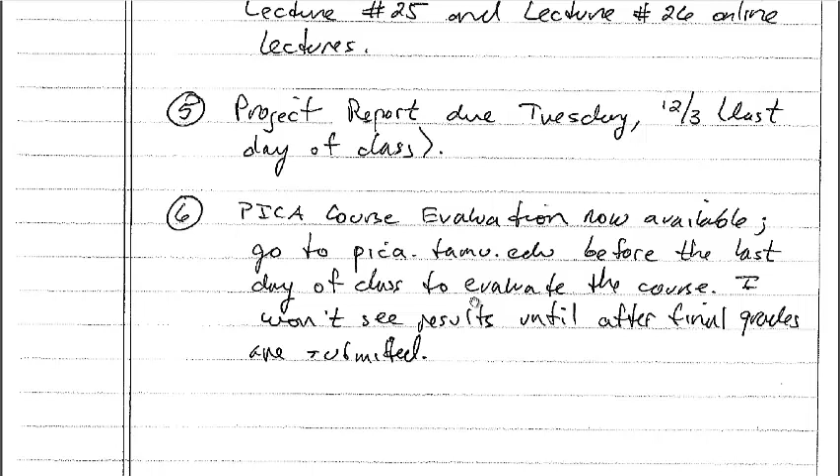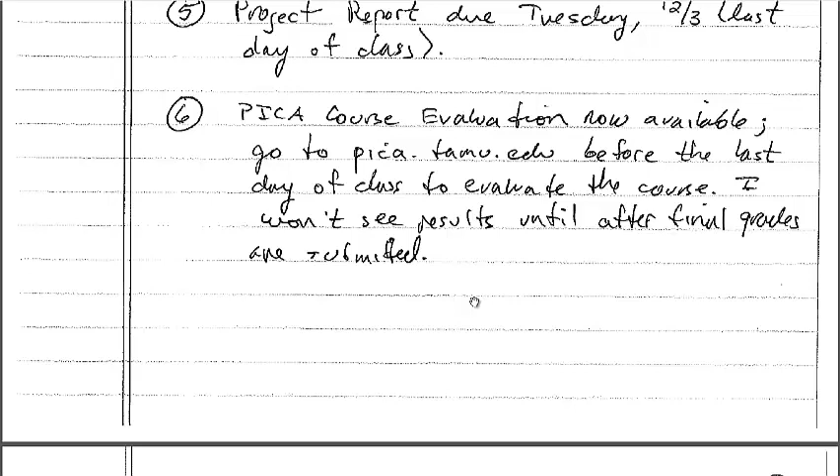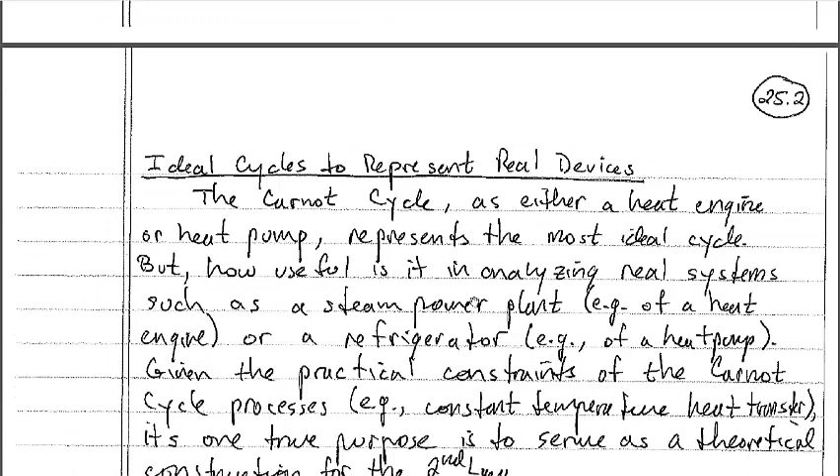Okay, on to the lecture material. What are we talking about today? If you remember where we were last week and in the weeks leading up to today, we started talking about heat engines, heat pumps, and refrigerators, combining components like boilers, condensers, turbines, and pumps. Together these make up what we call heat engine cycles, where a heat engine takes thermal energy and converts it to work energy, or heat pump cycles, which transfer thermal energy from low temperature to high temperature by using work energy input.

We then further analyzed the heat engine and heat pump cycles and asked questions such as: what is the most efficient heat engine cycle, or what is the heat pump cycle with the highest coefficient of performance? After much discussion, we talked about things like the Kelvin-Planck statement and the Clausius statement, and came up with what is called the Carnot device, or Carnot cycle, which is the perfectly reversible, totally reversible, ideal cycle.

This means that if a heat engine is operating on the Carnot cycle, producing a certain amount of work, and you put that work into a reversible heat pump also working on the Carnot cycle, you would be able to return the thermal energy back to the high temperature reservoir in a totally reversible cycle. We also talked about the various processes that make up the Carnot cycle.

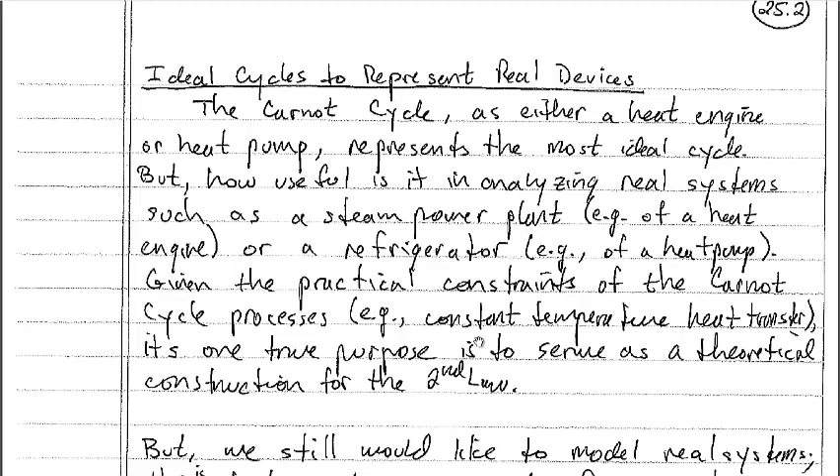Its only purpose, really, is to serve as a theoretical construction for the second law. That's really what the Carnot cycle does for us. It doesn't really give us an opportunity to analyze a real device. It just tells us what the maximum possible efficiency of a real device could be.

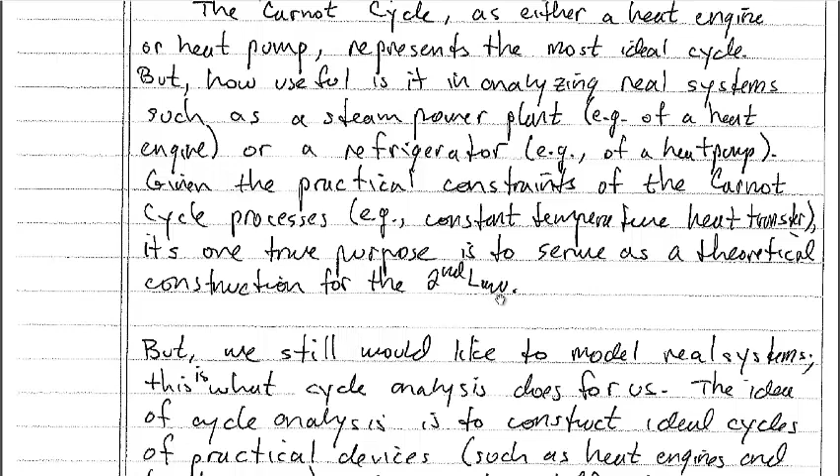In spite of this, though, we would like to be able to model real systems. That's what we do as engineers. As engineers, we are constantly constructing models in order to either analyze, design, or build something up in a more appropriate fashion. So we would like to be able to model these real systems, like a real steam power plant or a real heat pump or a refrigerator. And that's what cycle analysis does for us.

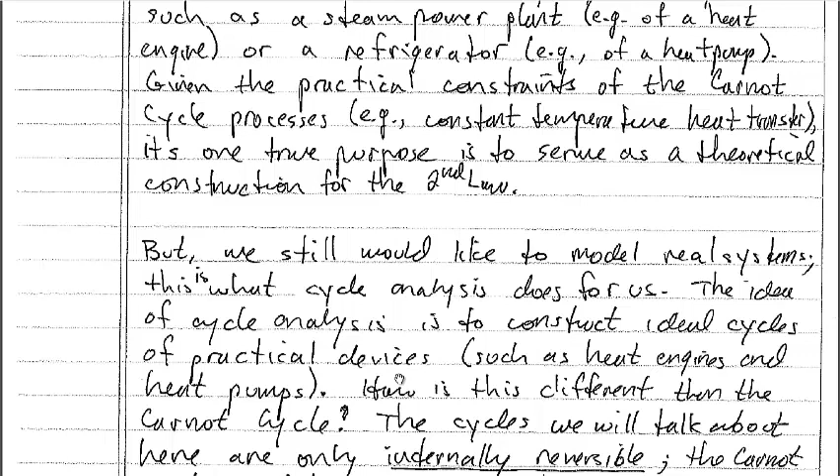The idea of cycle analysis is to construct ideal cycles of practical devices, such as heat engines and heat pumps. So how is this different than the Carnot cycle? Well, the cycles that we will talk about here are only ideal in the sense that they're internally reversible. The Carnot cycle was totally reversible, reversible both internally and externally.

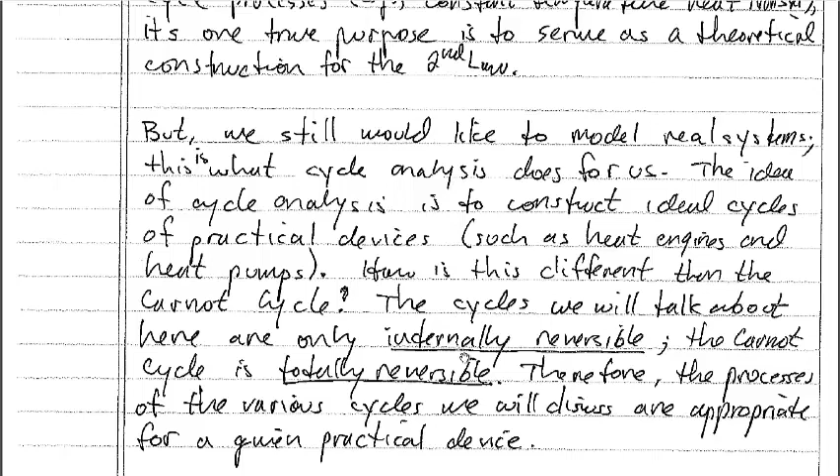Therefore, the processes of the various cycles that we'll discuss are going to be specific for a practical application or device. There's not going to be one single cycle that works for all of these devices we talk about. Each device, whether it be a steam power plant, a reciprocating piston engine, a rotating turbo machinery engine, a refrigerator, or an air conditioning system, they all have unique processes that they typically operate by. And cycle analysis allows us to define the processes of these cycles and then conduct engineering thermodynamic analysis on them.

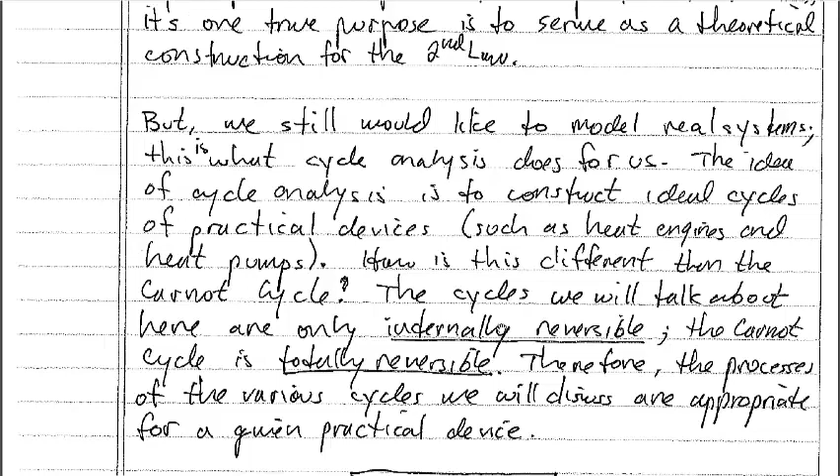Okay, so we're going to talk about several cycles basically until the end of the semester. This is really going to conclude the semester for us. And so I've got a little org chart, if you will, of cycle analysis.

So you've got president and CEO up here at the top, cycle analysis. And we can break cycle analysis into two parts. There are cycles that are specific to heat engine applications, and there are cycles that are specific to heat pump applications. Now, in the heat engine applications area, we can break that down into two categories as well.

There are cycles that are what we call vapor power cycles, and we'll define that in just a little bit. And there are cycles that are called air standard power cycles. We'll start talking about the air standard power cycles maybe a little bit on Thursday, but for sure next Tuesday.

So within the vapor power cycles is where we have the infamous Rankine cycle. We've talked about the Rankine cycle a few times this semester, even if we really haven't called it the Rankine cycle. The Rankine cycle is the simple steam power plant cycle. So most steam power plants around the world are operating on what we call the Rankine cycle.

Now there's lots of variations to the Rankine cycle, and your textbook does a really good job at going into all those variations, and I don't expect you to have to necessarily memorize all those, but you may want to read it for interest's sake. But one of the variations is what we call the reheat cycle. So today we're going to talk about the Rankine cycle, and then in lecture number 26 we'll talk about the reheat cycle.

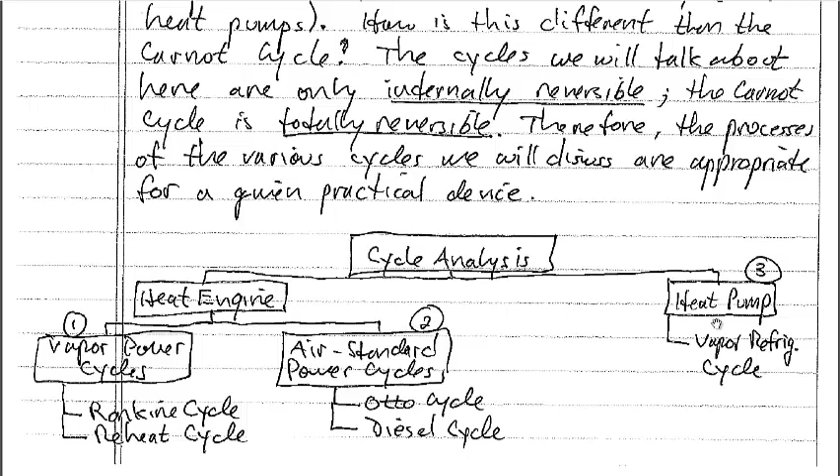Okay, so vapor power cycles. What are vapor power cycles? Well, the vapor power cycles are used to model heat engines, right? It's a heat engine cycle.

Vapor power cycles are called that because they rely on the substance vaporizing and condensing through the cycle. Water is very commonly used in a vapor power cycle, though it doesn't have to be. For example, power plants around the world have water as their working substance, undergoing the simple steam power plant cycle. So the steam power plant is an example of a cycle that operates as a vapor power cycle.

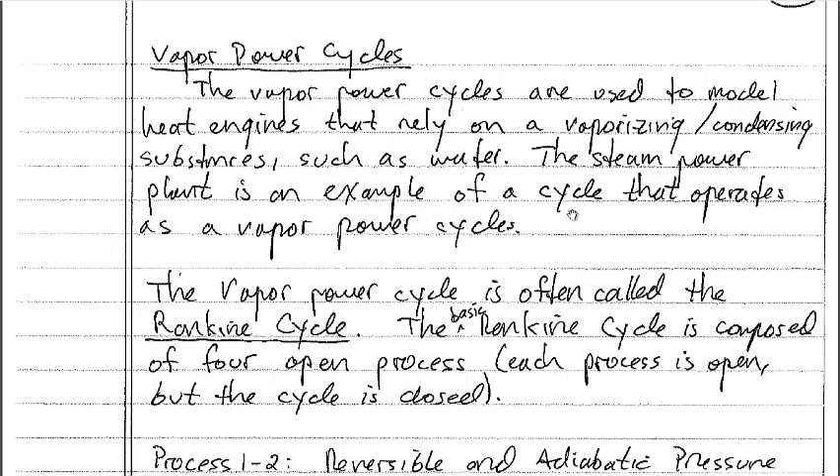Now, a specific type of vapor power cycle, which is really the most common type, is the Rankine cycle. There are lots of different variations to the Rankine cycle, but the basic Rankine cycle is composed of 4 open processes. Notice I put 'open' here, because that's important - it's going to dictate what first law equation we write down when we go through and do the cycle analysis.

When I say each process is open, that just means the process is open. It doesn't necessarily mean the cycle is open. In the case of a Rankine cycle, the cycle is in fact closed, or at least mostly they're closed.

But a heat engine cycle doesn't have to be closed. A heat engine cycle could in fact be open. And that's actually not the primary reason why an internal combustion engine does not abide to the information we get from the Carnot cycle. An IC engine doesn't precisely operate on a thermodynamic cycle, and it's not because it's open - it just has to do with the fact that you don't return your system to its initial state.

You start with reactants of fuel and oxidizer, fuel and air, and you end with products of combustion such as CO2 and water and other products. But that water and CO2 don't recombine to make fuel, which was your initial state. So because your system doesn't return to that initial state, an internal combustion engine does not operate on a thermodynamic cycle. It operates on a mechanical cycle, not a thermodynamic cycle, and therefore an internal combustion engine is not rigidly considered a heat engine.

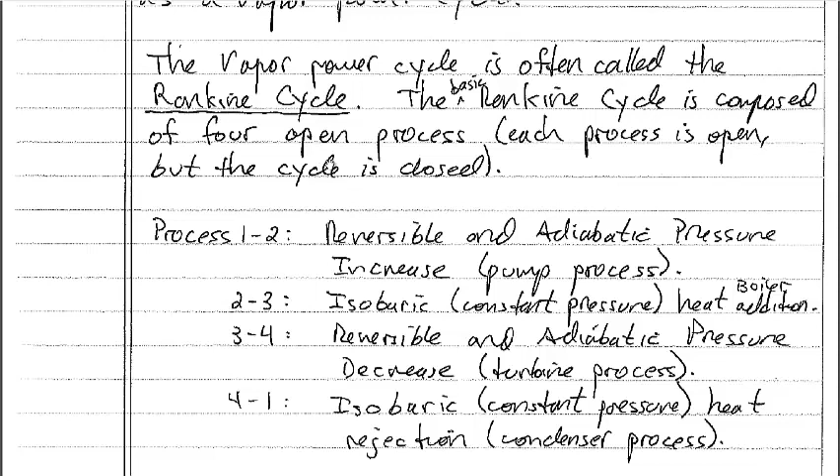A steam power plant, however, does operate on a cycle. The water returns back to its initial state, and they typically operate as closed cycles, which means the system is never open to the atmosphere - it always remains closed. So what are the 4 processes that make up the vapor power cycle?

There are 4 for the simple basic Rankine cycle, and they are as follows. The first process, process 1 to 2, is a reversible and adiabatic pressure increase. This is what we call our pump process.

Process 2 to 3 is an isobaric, meaning constant pressure, heat addition process - this would be our boiler process. Process 3 to 4 is a reversible and adiabatic pressure decrease - this is our turbine process. And process 4 to 1 is an isobaric, again constant pressure, heat rejection process - this is our condenser process.

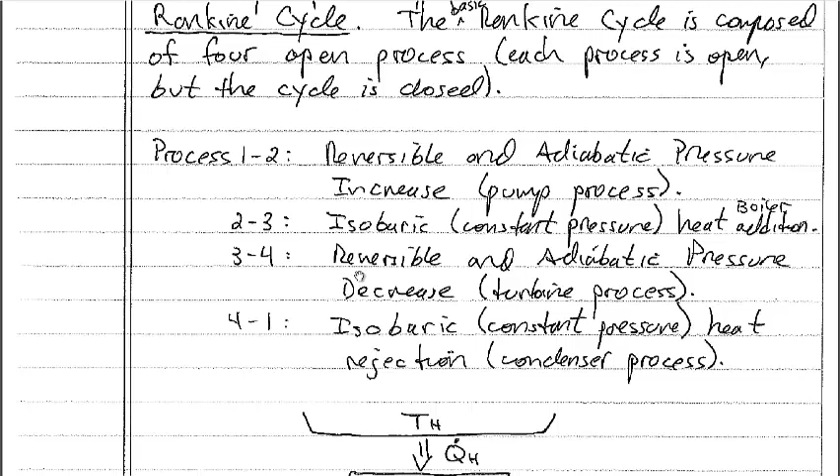So we can draw what this looks like. We have our heat engine with 4 processes, operating between a high temperature reservoir and a low temperature reservoir. By accepting thermal energy from the high temperature reservoir in the boiler, we make steam, and this steam is then expanded through the turbine and produces turbine work. A fraction of that turbine work goes into delivering work into the pump, since that's our pressure increase process, and the balance that doesn't get transferred leaves the heat engine system as net power, W dot net.

After leaving the turbine, the steam is then cooled, where this Q dot L, the necessary heat rejection, takes place, and Q dot L is sent to the low temperature reservoir T sub L. And then, of course, we have the pump process that increases the pressure in the system and provides mass flow rate for the cycle to operate in a cyclic fashion.

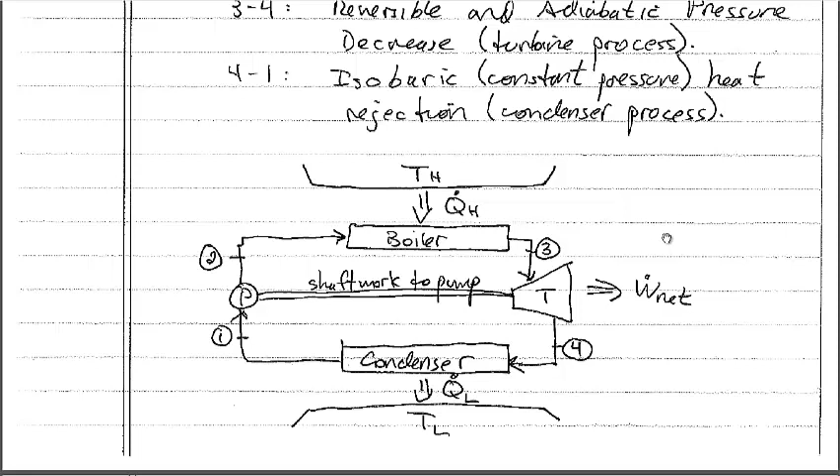We can also draw the four processes. Just to reiterate: this is process 1 to 2, our pump process. This is process 2 to 3, our boiler process. Process 3 to 4 is our turbine process. And process 4 to 1 is our condenser process.

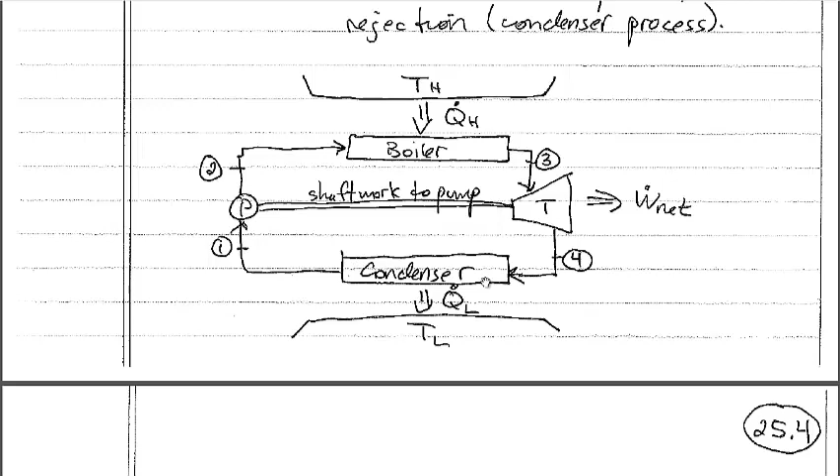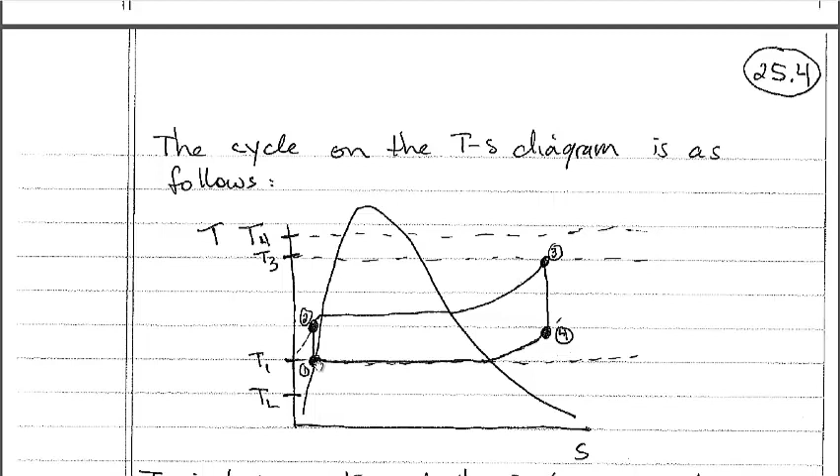So state 1 is before going into the pump process. One of the typical assumptions we make about the Rankine cycle, aside from the fact that when we say Rankine cycle it almost always means water is the substance of the cycle. You can basically assume that when you see Rankine, water is the substance, unless you're told otherwise.

The other typical assumption is that state 1, which is the state after the condenser process, after the heat rejection process and before the pump process, is a saturated liquid. So we start here at state 1 at our saturated liquid state.

We then undergo our constant entropy, reversible and adiabatic pressure increase from pressure at P1 to pressure at P2. We then undergo our constant pressure heat addition process. This curve you see here follows the line of constant pressure, adding thermal energy from state 2 up to state 3.

We then have process 3 to 4, which is our turbine process. That's our reversible and adiabatic pressure decrease, the expansion process. Because it's reversible and adiabatic, or isentropic, the entropy at state 4 is the same as the entropy at state 3. Then finally, the final process in the cycle is our constant pressure heat rejection process from state 4 to state 1.

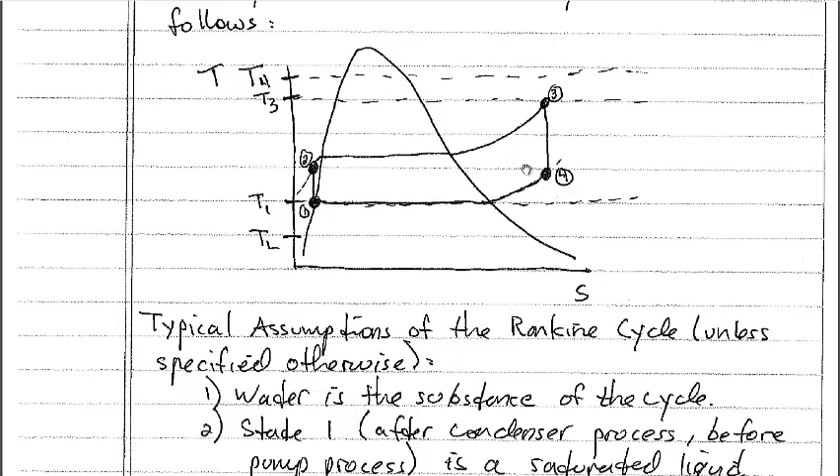Okay, so we can go ahead and do a process-by-process analysis to understand how we would find things such as the work transfer and the heat transfer. Ultimately what we want to find from a Rankine cycle analysis is what the net work of the cycle is and what the efficiency of the cycle is.

So for our first process, we have process 1 to 2. This is our reversible and adiabatic pump process. When we do a first law analysis, we see that our energy in, that is Q plus H1 - neglecting kinetic and potential energy, written on a mass-specific basis - is equal to our energy out, which is work plus enthalpy at state 2.

It's an adiabatic process, so Q is equal to 0. So we're left with work equals H1 minus H2. Now, typically H1 at state 1 is fixed, so if we wanted to calculate the work transfer, we have to be able to fix state 2.

Usually the maximum pressure in the cycle is known, or somehow you're able to determine it, so you usually know one independent property at state 2. But we have to figure out what the second independent property at state 2 is.

So our natural course of action has been to look at the second law. When we do a second law analysis of process 1 to 2, we see that the entropy at state 2 is equal to our heat transfer entropy added by thermal energy, plus our entropy at state 1, plus the entropy generation.

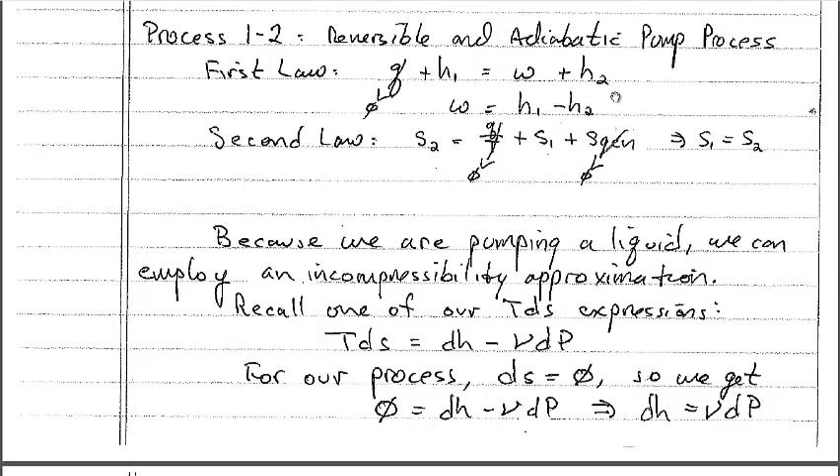The something else we can rely on is the fact that we're pumping a liquid. Because we're pumping a liquid, we can employ the incompressibility approximation. Remember, this means the substance's volume doesn't change substantially as its pressure changes. When we impose incompressibility, the specific volume stays constant. Well, how does that help us?

What we need to do is develop an expression of work transfer that we haven't talked about yet directly, but it's important to know. To do this, let's recall one of our TDS expressions. Remember a few weeks ago in lecture, we derived a bunch of equations for ideal gases, starting with what we call the two TDS equations.

One of the TDS equations is written here: TDS is equal to dH minus V dP. How does that help us? Well, for our process it's reversible and adiabatic, so dS is equal to 0. Since the left-hand side is equal to 0, it means dH minus V dP is equal to 0.

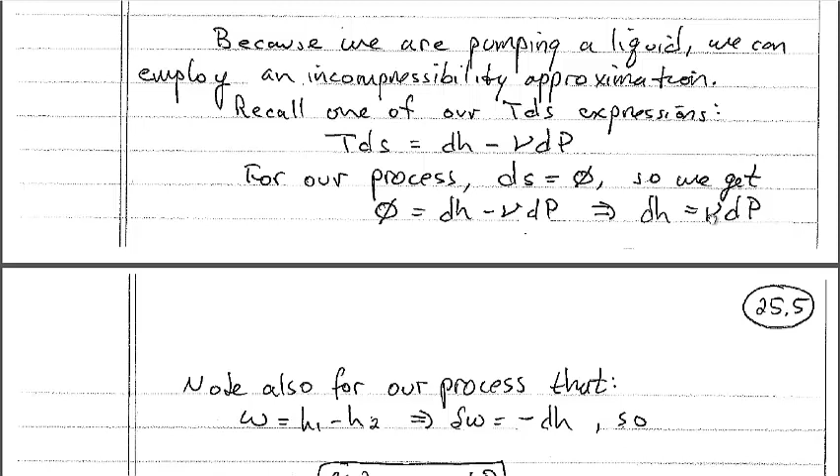So dH, the differential change in enthalpy, is equal to the specific volume times the change in pressure. We also noted from our process that the work transfer is equal to H1 minus H2. If I write this on a differential basis, the change in work, delta W, is equal to negative dH. This is H1 minus H2, not H2 minus H1, which would be a positive dH.

So I can equate the fact that dH is equal to V dP and that delta W is equal to negative dH. Equating those two, I get delta W equals negative V dP. Even though we analyzed this for our specific process of an incompressible substance undergoing a reversible and adiabatic process, it's actually a general result.

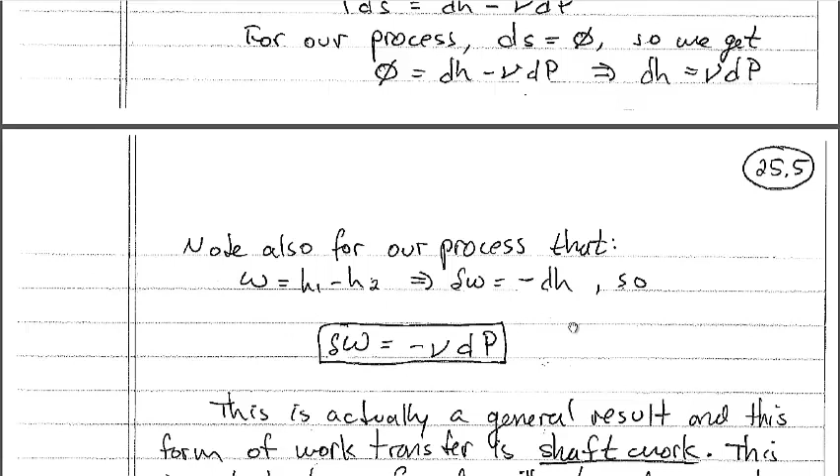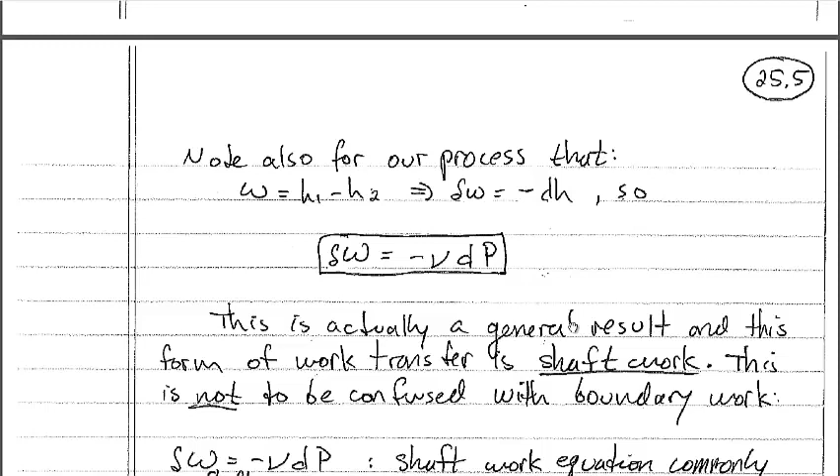This boxed equation, delta W equal to negative V dP, is something we call shaft work, a specific type of work transfer. To be rigorous, this shaft work should not be confused with boundary work, which looks very similar—we've talked about boundary work a lot in the context of closed system analysis with piston-cylinder arrangements, but they're two very different expressions, as summarized in the notes.

The shaft work is negative V dP. Boundary work, however, is P dV. No minus sign, and the terms being differentiated are different.

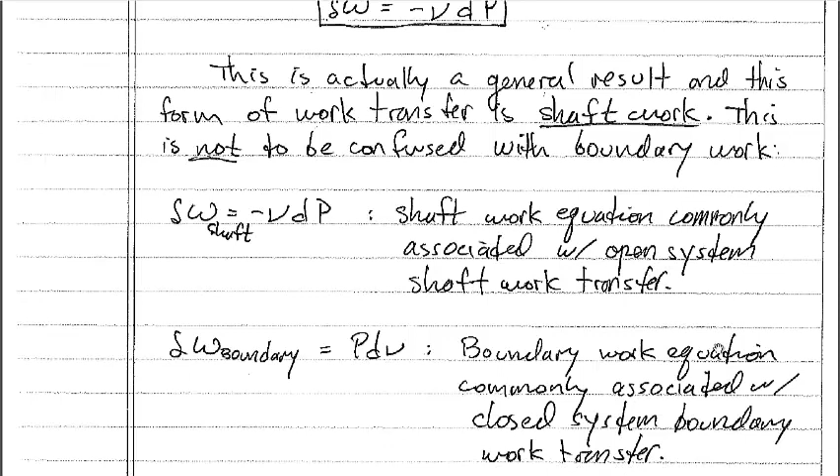This expression for shaft work, equal to negative V dP, is what we call the shaft work equation, commonly associated with open system shaft work transfer. If you have a turbine, for example, it's transferring work out governed by this equation. Likewise, boundary work, P dV, is the boundary work equation commonly associated with closed system boundary work transfer. So note the difference and don't confuse them.

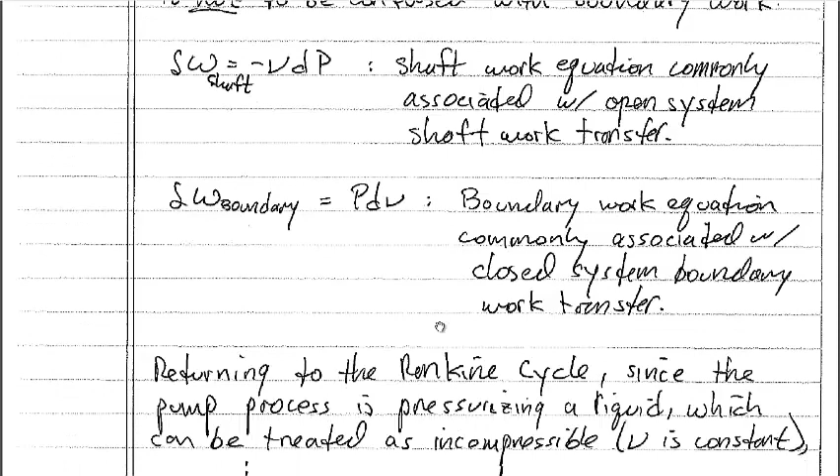But returning to our analysis of the Rankine cycle, since our pump process is pressurizing a liquid, which we can treat as incompressible, the specific volume of the water stays roughly constant as it undergoes the pump process. So from our first law result, delta W is equal to the integral from 1 to 2 of dH, and this equals the integral from 1 to 2 of negative V dP. The integral of dH from 1 to 2 is just H2 minus H1.

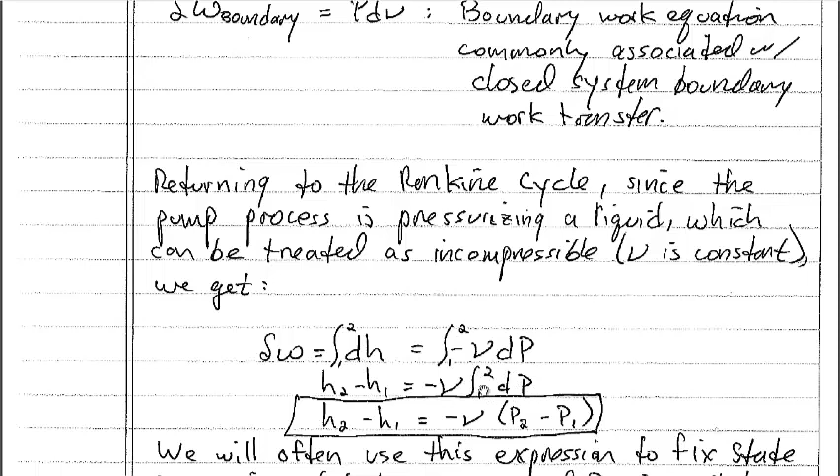Because our substance is incompressible, we can pull the specific volume out of the integral sign and get negative V times the integral from 1 to 2 of dP. This integral is also easy to analyze. So combining all of this, our change in enthalpy between state 2 and state 1 is equal to negative V, the specific volume of the liquid water, times the change in pressure.

So if we take a look at this, this is how we will typically find our enthalpy at state 2. State 1 is typically known—we can make the common assumption that state 1 is a saturated liquid at the low temperature in the cycle.

Pressure at state 2 is often given. So we can look up H1, we can look up V, we can just take this to be V1. P1 is usually given, and P2 is usually given. So we can use this expression to find H2.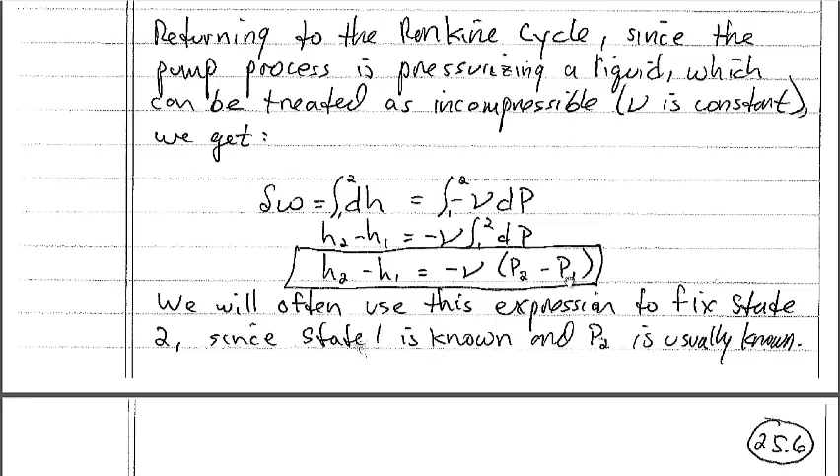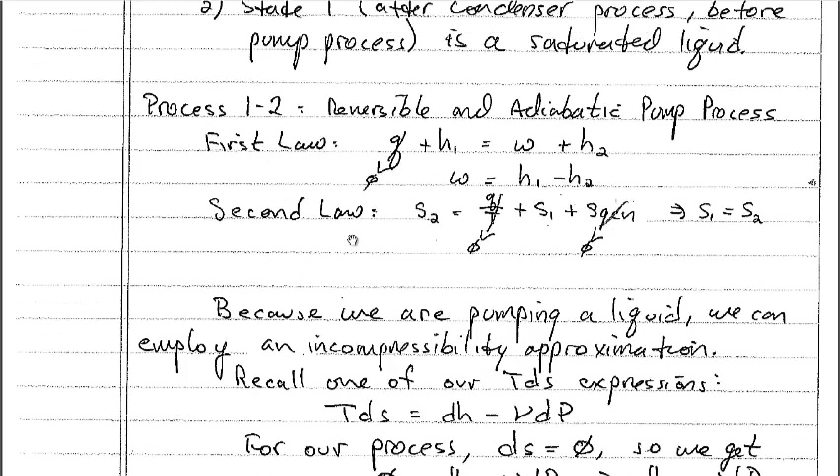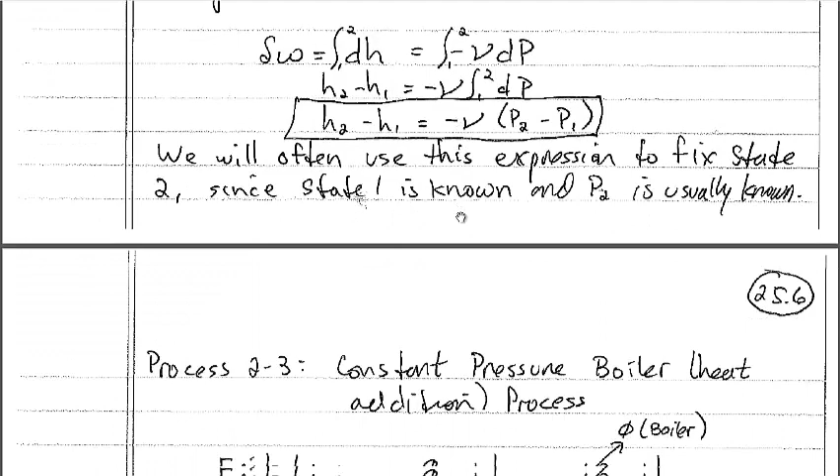That then allows us, if we go back up to our work transfer equation, to solve for the work transfer for process 1 to 2. But, as we'll soon learn, H2 is also used later on in process 2 to 3. So let's take a look at process 2 to 3.

In the case of process 2 to 3, we have a constant pressure boiler or heat addition process. Really the only thing we'll be able to write of substance for this process is our first law equation, where we can say that Q2 to 3, the heat transfer, plus our enthalpy at state 2 is equal to the work transfer plus our enthalpy at state 3.

Now this is a boiler process, and remember that boilers are not designed to transfer work. They're just designed to transfer thermal energy. So the work transfer for process 2 to 3 is equal to 0. And we get that Q2 to 3 is equal to H3 minus H2.

Usually enough information is known about state 3 that we can look up H3. And we found H2 in our analysis of process 1 to 2, which we had just described. The other important item to note is that this Q2 to 3 is the same as QH. QH is what's being added from the high temperature reservoir, and since that gets added to the boiler, process 2 to 3, these statements are all equivalent.

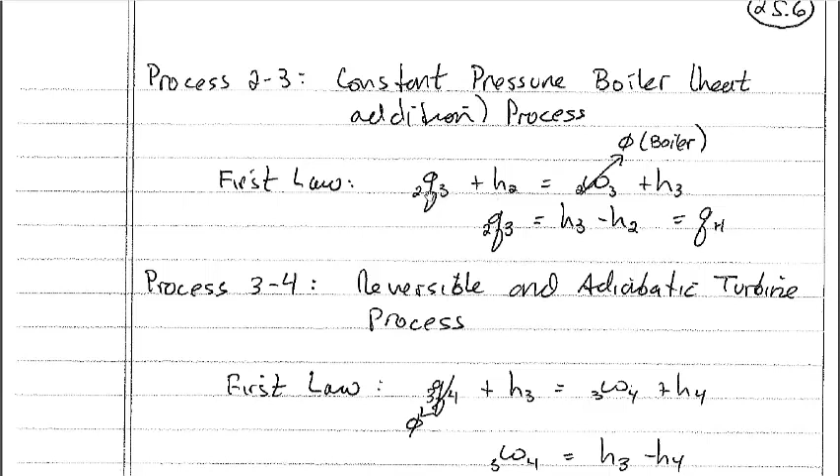The next process to analyze is process 3 to 4. Process 3 to 4 is our reversible and adiabatic turbine process. So again, we can go ahead and write the first law for process 3 to 4, and we get that Q3 to 4 plus H3 is equal to work 3 to 4 plus H4.

It's, of course, an adiabatic process, so Q3 to 4 is equal to 0. And we get that work 3 to 4 is equal to H3 minus H4. Now again, we may have to fix either state 3 or state 4, depending on what information is available to us.

So we may need to rely on the second law to help us fix either state 3 or state 4. Of course the second law equation for this process is that S4 is equal to Q divided by temperature plus the entropy at state 3 plus the entropy generation. It's a reversible process, so Sgen is equal to 0, and it's an adiabatic process, so our heat transfer term is equal to 0. So of course we get that entropy at state 4 is equal to entropy at state 3 for this reversible and adiabatic process.

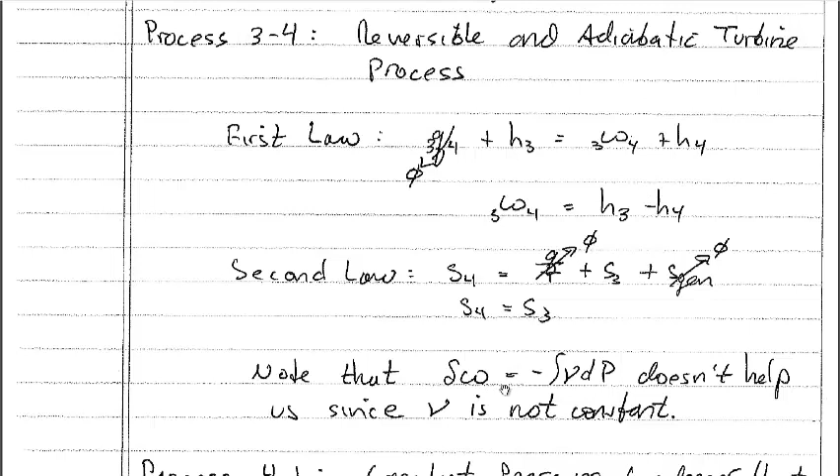Now, one item I want to point out here is that this statement is true: we can definitely say that the shaft work, delta W, is equal to negative integral of V dP. But what's also important to note is that this equation doesn't really help us, and the reason is because V is not constant through the process, and we usually don't know how V varies with pressure. So this form of the shaft work equation for this particular process is not too terribly helpful.

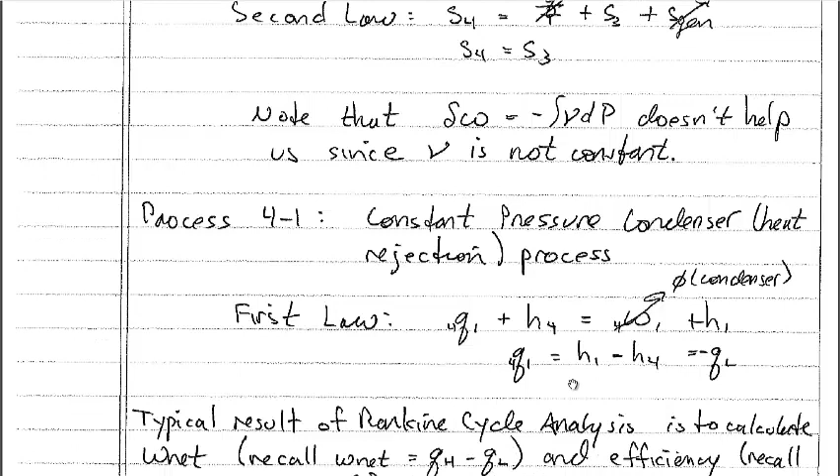Okay, we can then go on to process 4-1, which is our constant pressure condenser process, our heat rejection process. Our first law tells us that Q4-1 plus H4 is equal to work 4-1 plus H1. And because it's a condenser, it's designed to transfer thermal energy, not designed to transfer work energy, for example. We get that Q4-1 is equal to H1 minus H4.

And just like above, where Q2-3 was equal to QH, we can also say that Q4-1 is equal to the negative of QL. It's important to remember that, because all semester long we've been writing the first law equation for our heat engine taking into account the fact that QL was leaving the system. So it's important to make sure that you retain that minus sign when equating Q4-1 to QL.

Okay, so now that we've gone through and analyzed each of the processes, we would then basically do what we're after by doing the cycle analysis. And that is to calculate the net work, right? We're really interested in knowing what the net work from the cycle is.

I'll just remind you that we are still talking about a heat engine cycle. So all of the information that we talked about earlier when talking about heat engines, such as net work is equal to QH minus QL, still applies. This is all still true.

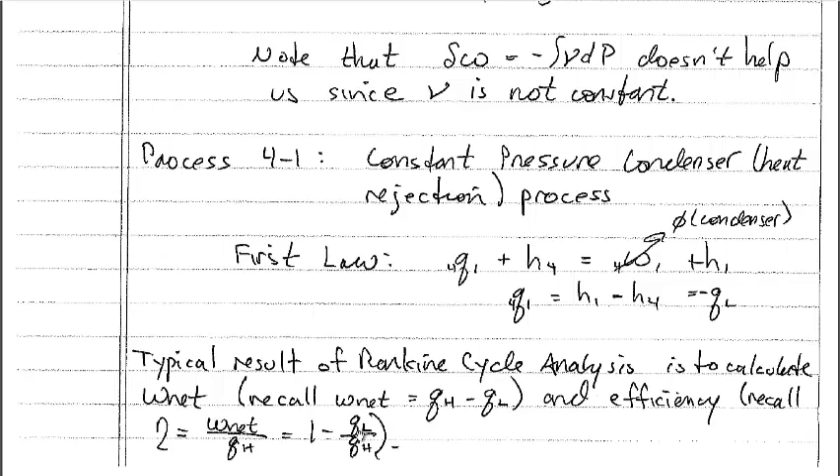Okay, so I have an example for you, and this basically just sort of pulls together all of the information that we've talked about the Rankine cycle so far.

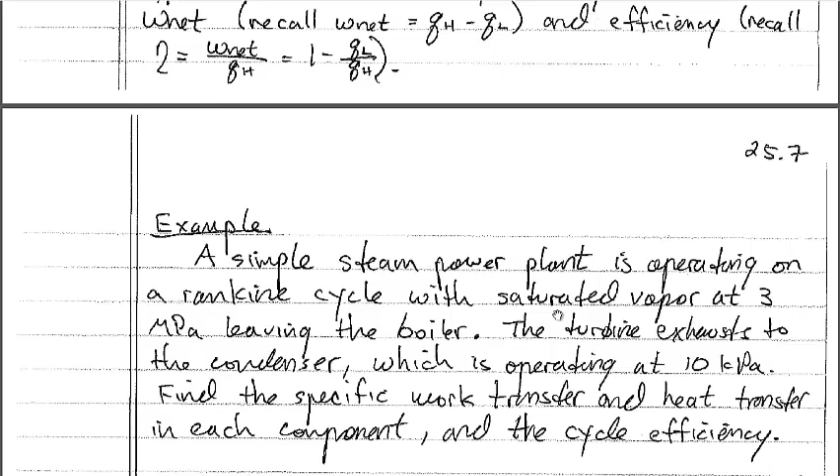So we have in this example a simple steam power plant, and it's operating on a Rankine cycle with saturated vapor at 3 megapascals leaving the boiler. That piece of information is in fact telling us our state 3 information. We're also told that the turbine exhausts to the condenser, and the condenser is operating at 10 kilopascals, the low pressure side of the cycle. We're asked to find the specific work transfer and the specific heat transfer in each component, and to calculate the cycle efficiency.

Okay, so to do this, I have it starting on the next page here. So the first thing that I do is I draw the simple steam power plant cycle. So I have it drawn the same way that we talked about in the lecture notes, where we have process 1 to 2 as our pump process, process 2 to 3 as our boiler process, 3 to 4 is our turbine process, and then 4 to 1 is our condenser process. And I also like to draw this on TS diagrams.

So we have our TS diagram over here. Of course, we've got our saturation dome. It's important to remember to include the saturation dome. And we start state 1 here on the saturated liquid line. Remember, that's one of the typical assumptions that we make with the Rankine cycle, is that the state after the condenser but before the pump is on the saturated liquid line. So that's our state 1.

We then have process 1 to 2, which is our reversible and adiabatic pump process. So it's constant entropy, so state 2 is directly above state 1, but at a higher pressure. We then have process 2 to 3, which is our constant pressure heat addition process. Now, state 3, we're told, is a saturated vapor at 3 megapascals. And so I have state 3 drawn right here on the saturated vapor line.

We then have process 3 to 4, which is our reversible and adiabatic pressure decrease process, or our turbine process. And so because it's reversible and adiabatic, or isentropic, state 4 is directly beneath state 3. And then to close our cycle, we have process 4 to 1, so this is our return process. And that is, of course, a constant pressure heat rejection process going in the direction toward number 1.

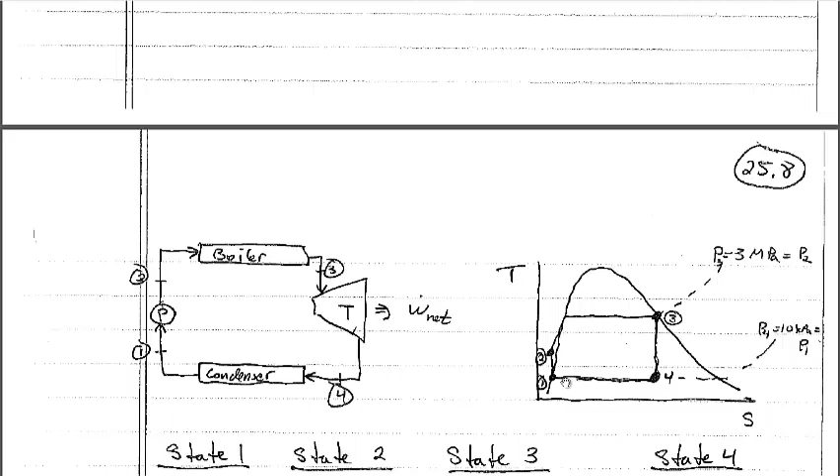I also like to write down state information. So we know, for example, that because we're told that the low pressure in the cycle is 10 kPa, we know that that's the pressure at state 1. State 1 is at the low pressure in the cycle, as well as state 4, since process 4 to 1 is a constant pressure process.

At present, we don't really know anything about state 2 except the fact that we know pressure at state 2 is the same as pressure at state 3, because process 2 to 3 is a constant pressure process. But we don't know anything else about state 2 just yet. We were given lots of information about state 3. We were told that the pressure is equal to 3,000 kPa and that the quality at state 3 is equal to 1.

Now you may be wondering, well, I don't remember seeing quality being equal to 1 in the problem statement. And that is true. We weren't explicitly told that quality at state 3 is equal to 1, but we were told that it's a saturated vapor after the boiler process. And since it's a saturated vapor, state 3 is right on that saturated vapor line, and therefore the quality at state 3 is equal to 1.

We then have process 3 to 4, which is our reversible and adiabatic pressure decrease. So our entropy at state 4 is the same as the entropy at state 3. And then finally, because it's a constant pressure process between state 4 and state 1, we know the pressure at state 4 is equal to 10 kPa.

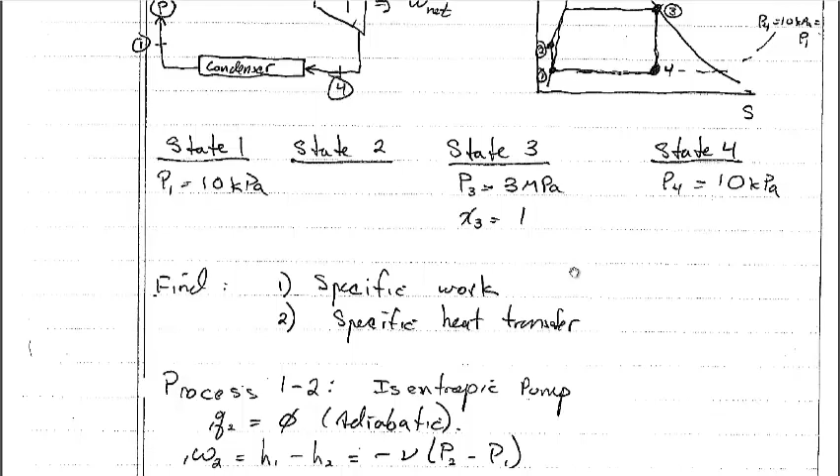So we're, of course, wanting to find the work transfer, the specific work transfer, as well as the specific heat transfer in all of the processes.

So doing a process-by-process analysis, that's typically what we do when we do a cycle analysis. We start with process 1 to 2, which is our isentropic pump process. And since it's isentropic, it's reversible and adiabatic, our Q is equal to 0. Our first law equation tells us that work from 1 to 2 is equal to H1 minus H2.

Since, as we talked about in the analysis of the development of the Rankine cycle, only for process 1 to 2, because the specific volume of the water doesn't change during that pump process, we can say that this H1 minus H2 is equal to negative V times P2 minus P1.

Also, since process 2 to 3 is a constant pressure process, we know that pressure at state 2 is equal to pressure at state 3. And likewise, since process 4 to 1 is a constant pressure process, we know that pressure at state 4 is the same as the pressure at state 1.

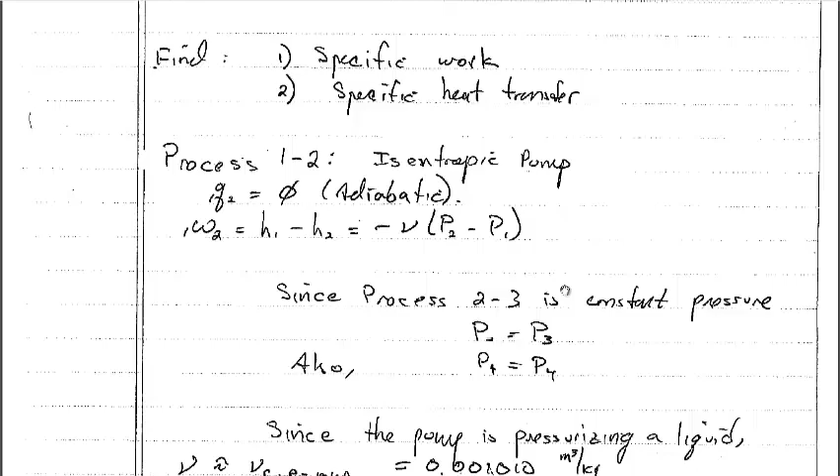Okay, so we can find out H2 easy enough because we can use our equation up here, our work equation. And so we get that we have the pump that's pressurizing a liquid. And at state 1, we have state 1 being a saturated liquid.

So its specific volume is equal to the saturated liquid specific volume at a pressure of 10 kilopascals. So when we go to table A4 to look that up, we see that the specific volume at this pressure as a saturated liquid is 0.001010 cubic meter per kilogram.

Since P2 is equal to P3, which is equal to 3,000 kPa, and P1 is equal to 10 kPa, we can calculate the work transfer for process 1 to 2, which is equal to negative 3.02 kilojoules per kilogram.

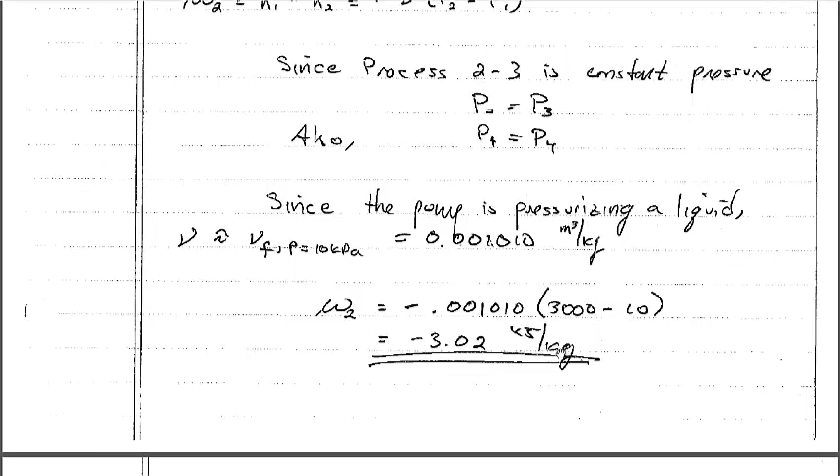Also, since work 1 to 2 is equal to H1 minus H2, we can say that our enthalpy at state 2 is equal to our enthalpy at state 1 minus our work transfer, bearing in mind that this work transfer is actually a negative number.

So again, we need to know what H1 is, so we go to table A4 and we look up the saturated liquid enthalpy at the pressure of P1, 10 kPa, and we see that the enthalpy at that condition is 191.81 kilojoules per kilogram. So knowing this information, we can then plug that into our equation for H2 and get that the enthalpy at state 2 is equal to 194.83 kilojoules per kilogram.

Moving on to process 2 to 3, this was our constant pressure heat addition process. So our heat transfer is equal to H3 minus H2. H2 we already know, we determined that from our process 1 to 2 analysis.

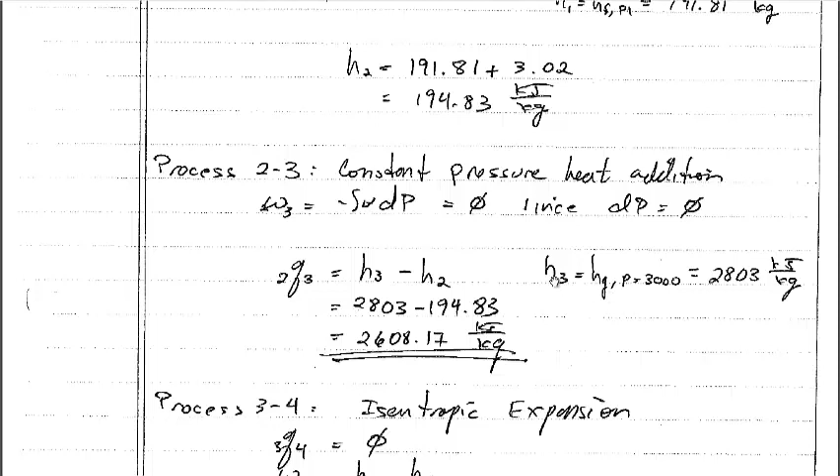And H3 we also know because we know that state 3 is saturated vapor at a pressure of 3,000 kPa. So the enthalpy at state 3 is equal to the saturated vapor enthalpy at a pressure of 3,000 kPa. So we go to table A5 to look this guy up, and we see that the enthalpy at that state is equal to 2,803 kilojoules per kilogram.

Plugging all of this back into our first law equation, we get that Q2 to 3 is equal to H3 minus H2. And plugging in now our known values, we see that Q2 to 3 is equal to 2,608 kilojoules per kilogram.

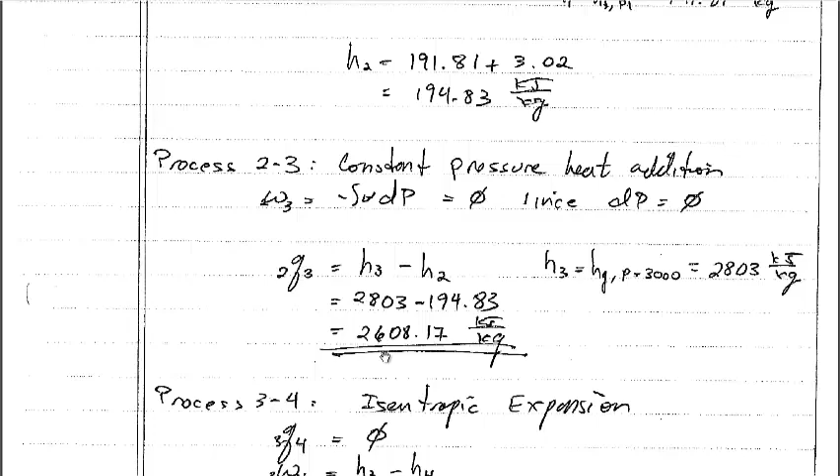We can then move on to our process 3 to 4, which is our isentropic expansion process. So again, it's reversible and adiabatic, so Q3 to 4 will equal 0 for this turbine process.

Work 3 to 4 is, from our first law analysis, equal to H3 minus H4. Here we have to use our second law equation to help fix our unknown state, which in this case is the entropy at state 4.

Based on second law analysis, we see that the entropy at state 4 is equal to the entropy at state 3, which, when we look up the entropy value at state 3 in table A5, is equal to the saturated vapor entropy at a temperature of T3.

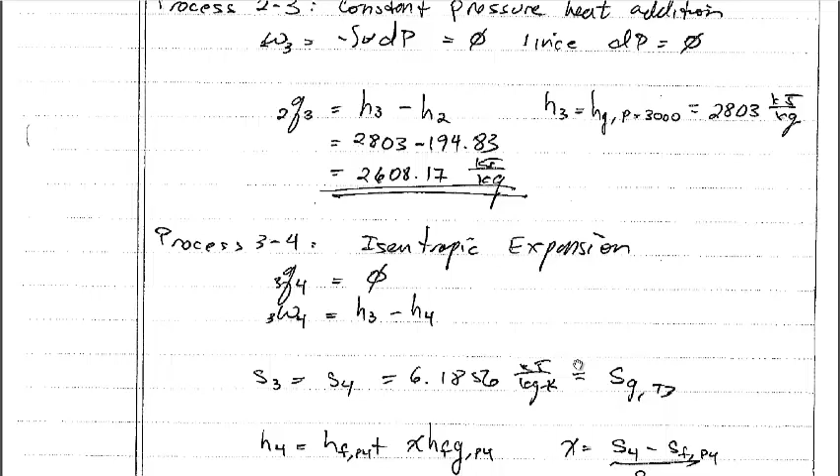So now when I look at this entropy value and where I find it in my tables, I actually find it in the saturated tables. And if we look at our TS diagram, this makes sense, right?

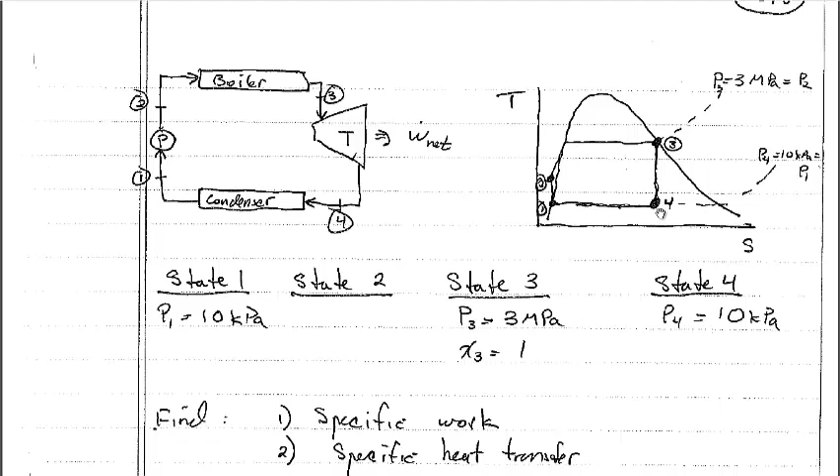We have state 3 right here, right on the saturated vapor line, and because of the curvature of the TS dome, state 4 is going to be underneath state 3, where it has quality - where it's a two-phase mixture. So in order for us to determine the enthalpy at state 4 so that we can calculate work 3 to 4, we have to know what that quality value is.

So we go ahead and say that our enthalpy at state 4 is equal to the saturated liquid enthalpy at a pressure of 10 kPa plus the quality times the latent energy of vaporization, HFG, the difference between Hg and Hf.

Knowing our entropy at state 4, we can use our quality equation, where quality is equal to S4 minus the saturated liquid entropy at a pressure of 10 kPa divided by the entropy of vaporization, SFG, at a pressure of 10 kPa. That gives us our quality, and so our quality at state 4 is equal to 0.738.

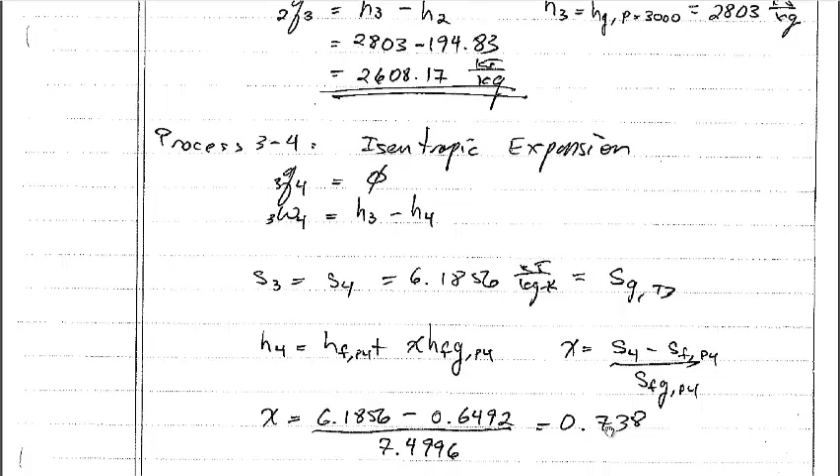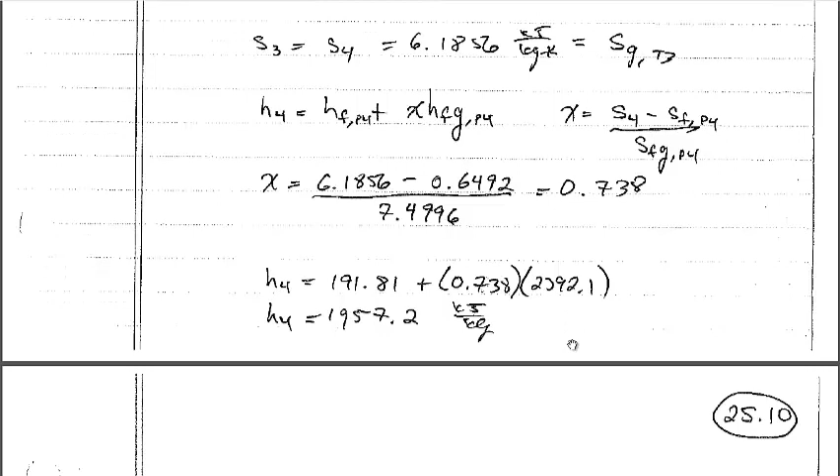Now that we know what the quality is, we can use it in the other direction to determine the enthalpy at state 4. Enthalpy at state 4 is equal to the saturated liquid enthalpy at a pressure of P4 plus the quality times the enthalpy of vaporization at a pressure of 10 kPa. When we plug all of this in, we get that the enthalpy at state 4 is equal to 1,957.2 kilojoules per kilogram.

Now with that information, we can calculate our work transfer for process 3 to 4, which is equal to H3 minus H4. We now know both of those parameters, and so we get that the work transfer from 3 to 4 is equal to 846 kilojoules per kilogram.

The final process is process 4 to 1, our constant pressure heat rejection process. For the first law analysis of this process, we get that the enthalpy at state 1 minus the enthalpy at state 4 is equal to Q4 to 1, our heat transfer for that process.

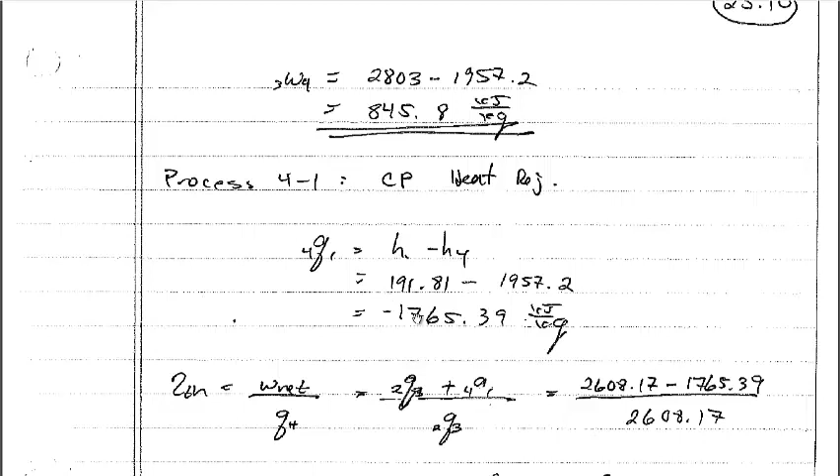We know H1 and H4, so we can just plug these quantities into our equation and get that our heat transfer Q4 to 1 is negative 1,765 kilojoules per kilogram.

So the final thing we're asked to calculate is the efficiency of the cycle. The efficiency of the cycle is defined as the net work divided by the high temperature heat input, QH. You could calculate the net work one of two ways.

You can either sum work 1 to 2 with work 3 to 4, or you can recognize that Q2 to 3 and Q4 to 1 must equal the work transfer, based on the fundamental statement of the first law, conservation of energy: the cyclic integral of work transfer equals the cyclic integral of heat transfer. This W net basically represents the cyclic integral of work transfer, so this numerator is also equal to Q2 to 3 plus Q4 to 1.

Since I didn't directly calculate the net work, it's easier to plug these numbers into the efficiency equation: Q2 to 3 is equal to 2608, and Q4 to 1 is equal to 1765, both in kilojoules per kilogram. When we plug those numbers in, we get that the efficiency of the cycle is equal to 32%.